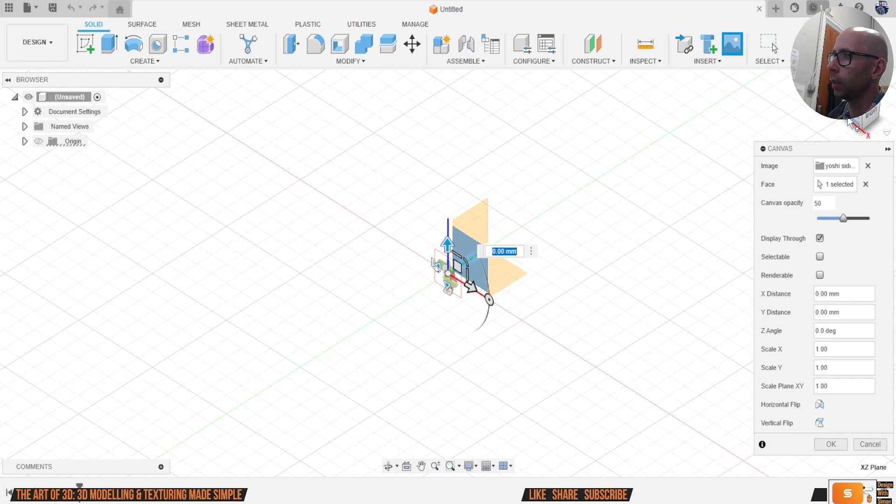So first thing we're going to do is bring in our reference image. We can do that by coming up here to insert canvas. I'm going to find my reference image, which I've got down here. I'm going to put it on this side plane, click on the side down here, flip it around and just make it a little bit bigger. I'm not too worried about it being the right size yet. I'm just going to bring it up to sit on the top like that.

The next thing I'm going to do is hit save and call this something like that, so that way autosave's kicked in. So the first thing we're going to do is essentially sketch out the 2D profile of all of these individual bricks. So I'm going to click on sketch, click on this, and then basically it's using a lot of lines and circles. So you go to create and line there, or keyboard shortcut L. It doesn't matter where you start, but I'm essentially going to just start following along close to the reference as much as I can.

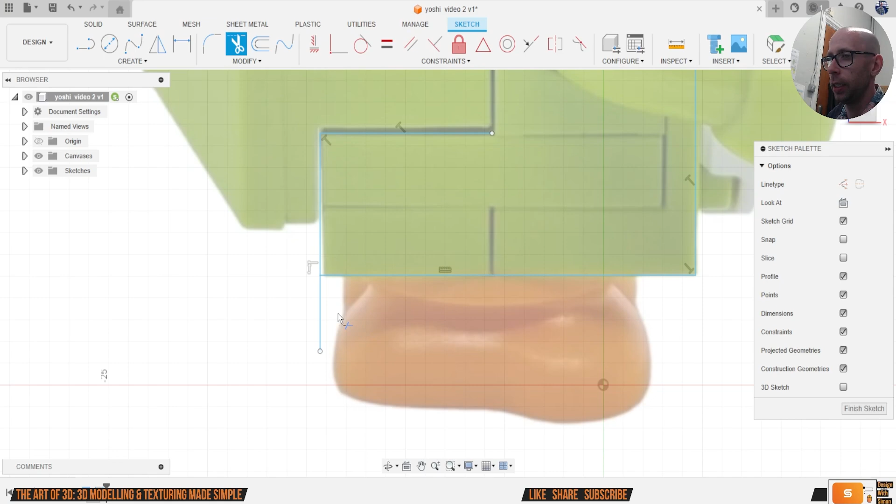So I'm going to do individual bricks. The key thing I want to do here is make sure everything matches up. So here you can see it doesn't. You have to modify and extend, just extend that bit. I'm going to hit T to trim to get those bits off. So that's the overall bit there. I've not done this one here, but I want to actually do the individual bricks as well. So I'm going to go across here.

You come up like that. Anywhere where there's separation, where these are clearly separate bricks, that's where I'm going to come across. And I'm going over because sometimes if you go a bit too close to a line, it tries to snap onto certain points. It doesn't always snap where you want it to. So I'm going over a little bit so I can do it that way.

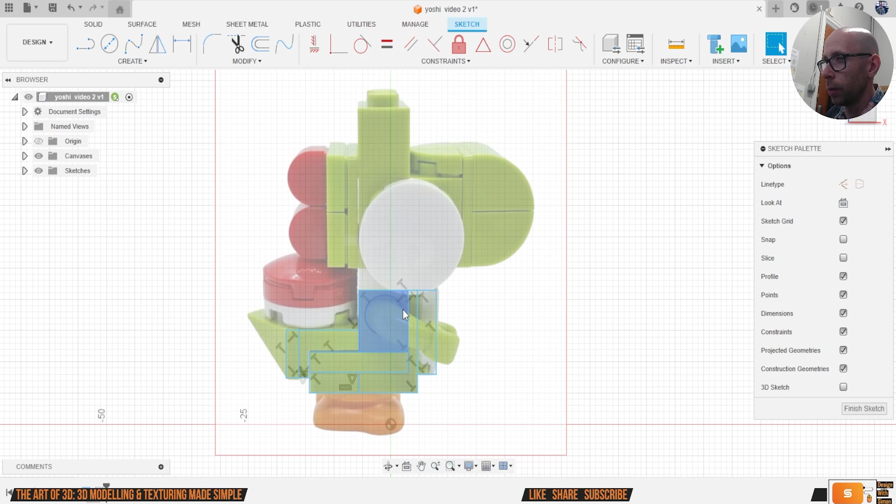I'm going to do this bit, but I'm not going to do this bit yet. I'm going to leave that a little bit later. I'm not going to do the arms yet. I'm not going to do the shell yet. I'm not going to do the cheeks just yet. I want to get this idea of the actual block of everything first. So let's come up.

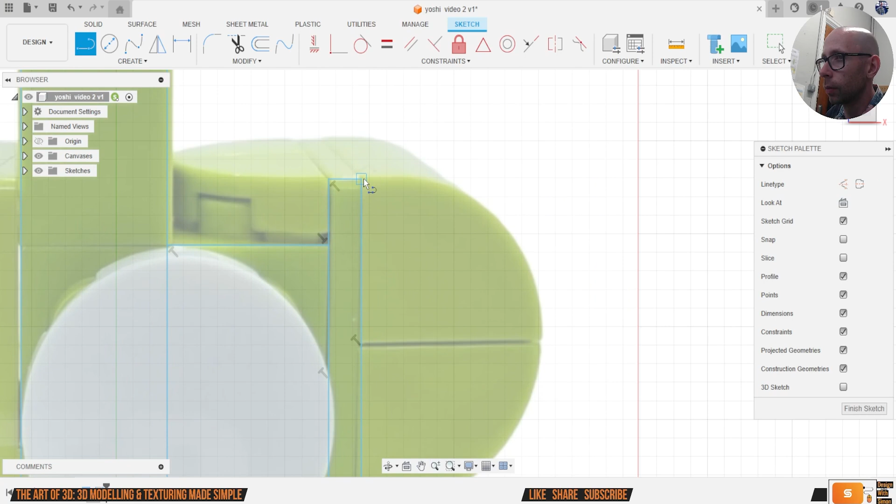I'll make sure those line up. And these ones here, I'm just going to do as a normal rectangle because we'll fillet these edges round. So don't worry if they're not matching up like that. So that comes across there. We're going to trim that section off. We want those to line up like that.

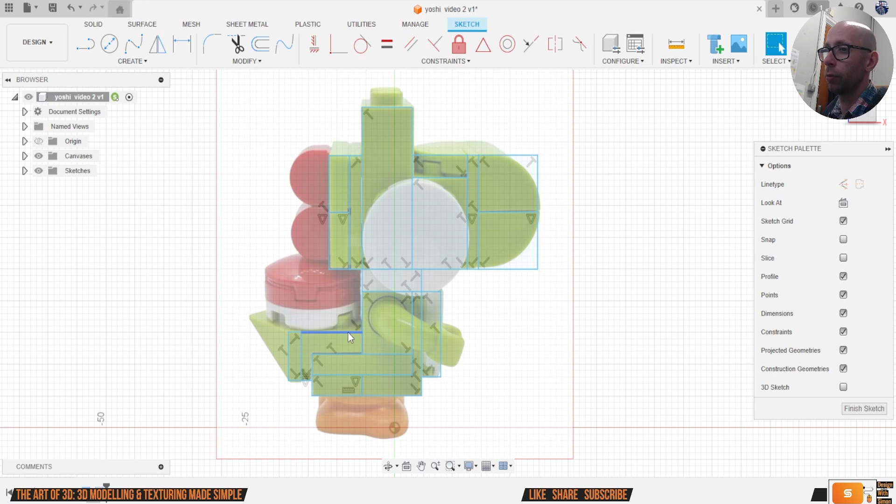Okay, so we've got the rough shape of where most of the bricks are going to go. There's certain parts we'll do separately: the bits on the shell, the bits on the back of the neck, and the feet. But for now, hover over, and if it highlights, that means it's a closed profile. We can start to actually turn it into a 3D object. You can do that by either clicking Finish Sketch or go to Create and Extrude. It's keyboard shortcut E. You don't even need to finish the sketch. If I go back into this sketch and just hit E now, it'll finish the sketch for me.

So I'm going to pick one, doesn't matter which one to begin with. We'll just grab the nose. I'm going to set it to symmetric, so it's going to be the same on both sides, and drag it out. Now I don't have a reference image for the front, so I'm kind of just going to go by what I feel will be about right. So I'm going to do something like that. Click OK. Now once we've done that, Fusion thinks we're finished with the sketch, and the sketch has disappeared. So we're going to come under sketches, turn the eyeball back on, like that. And now it's pretty much the same thing.

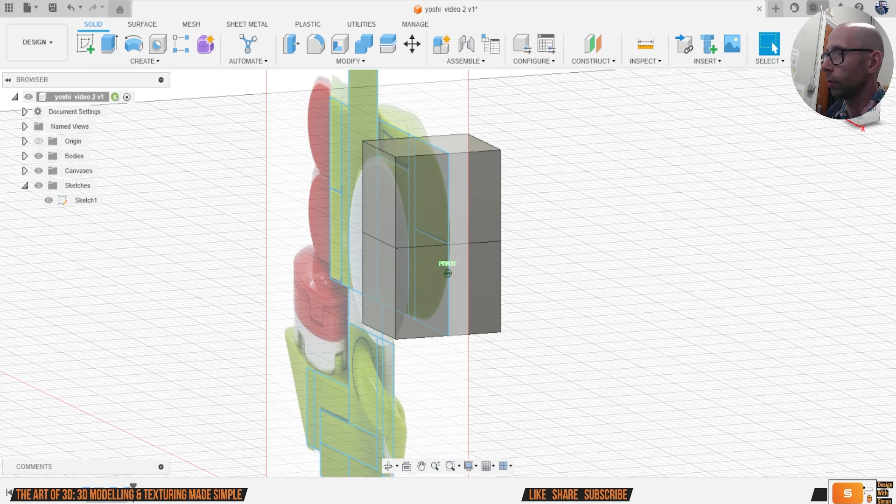We're going to hit E to extrude. Now, I know what measurement I did, but say you didn't, you could just click on that edge and it will automatically do the same. If I go into symmetric, do that. So it's the exact same measurement, but it's trying to join it. So I go from join and put that to new body, like that. So now it's a case of just repeating that step.

So what we're going to do is just go along, click on each one, go to symmetric, and go to new body. There's a bit of rinse and repeat of this bit, just sort of block it all out. Because all we're trying to do is, first of all, make sure everything is symmetrical, and we want the middle of the body to be the middle of the actual workspace. So when we do symmetry, things like that, it makes it a lot easier.

So there's nothing super exciting or complicated to explain for this particular bit. It's just a case of making sure that it's symmetrical and they are separate bodies. So we want to make sure, turn the sketch off so you can see what's going on. They are separate bricks. That's the key thing that we want at the minute. So I'm going to turn it back on, keep working our way around.

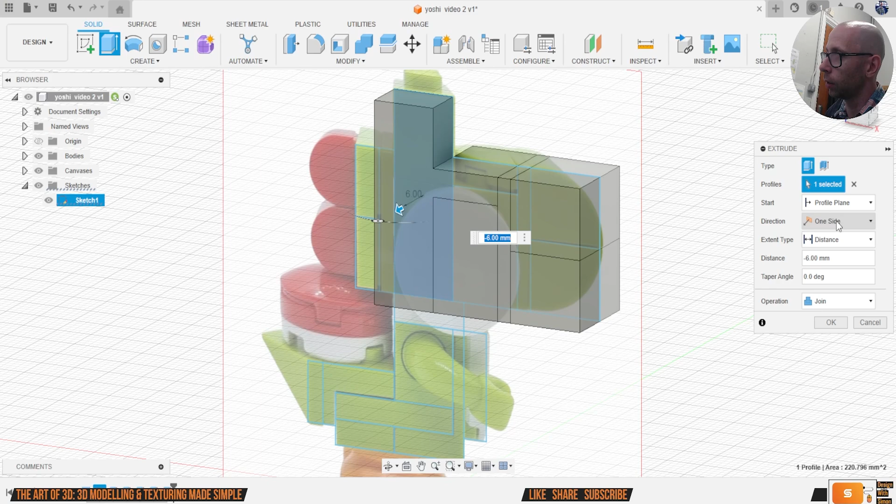If I remember when I'm editing this, I will speed this up, although I always say that and then I always forget. Make sure it's symmetrical.

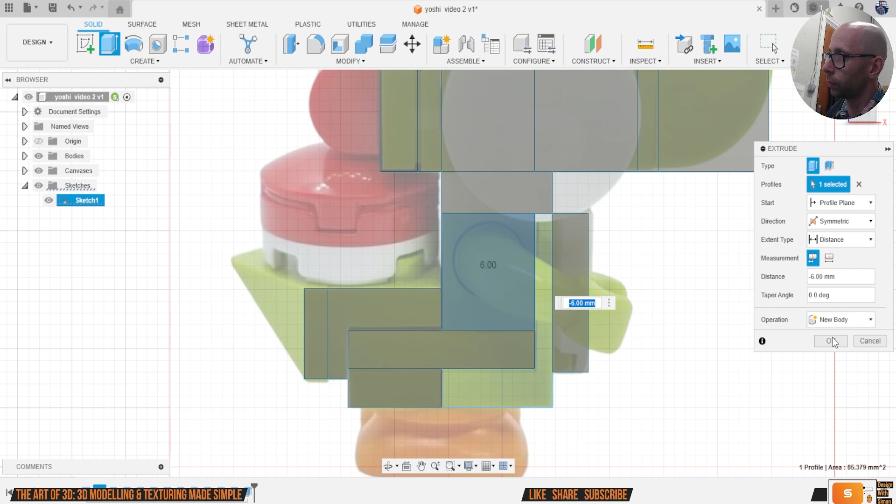Okay. So if we have a little look around, you can see we've kind of got the rough sort of shape that we want. I'm just going to start to shape a few more of these. So I'm going to turn that sketch off now, we don't need it. I can press the eyeball. If I hit F to fillet, I'll come to modify and fillet there, but keyboard shortcut F. I'm going to grab tips of nose and drag in to round that off a little bit. Like that, just going to give that a bit more shape.

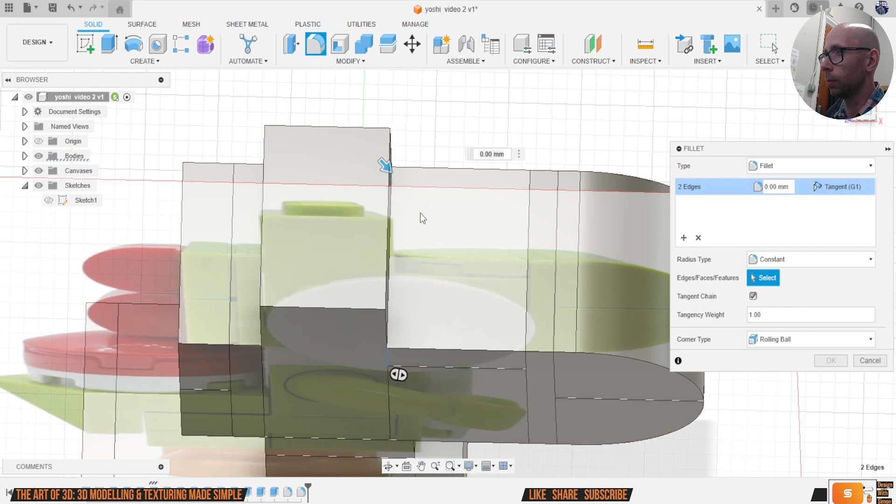Same with his tummy. Up a little bit. Like that. The same up here as well. So let's grab this bit, come to the top. Like that. It's starting to take a bit more shape.

What we'll then do is let's have a go at doing his tail here. So I'm going to go to construct, offset plane, or you can just click on that. That's the automatic one there. I'll drag up so this line here is in line with that. I'm going to create a sketch. And all I'm going to do is hit P to project that cube. L for line just to find the middle and just draw it down. And the whole point of doing that is just so I can get this particular dot.

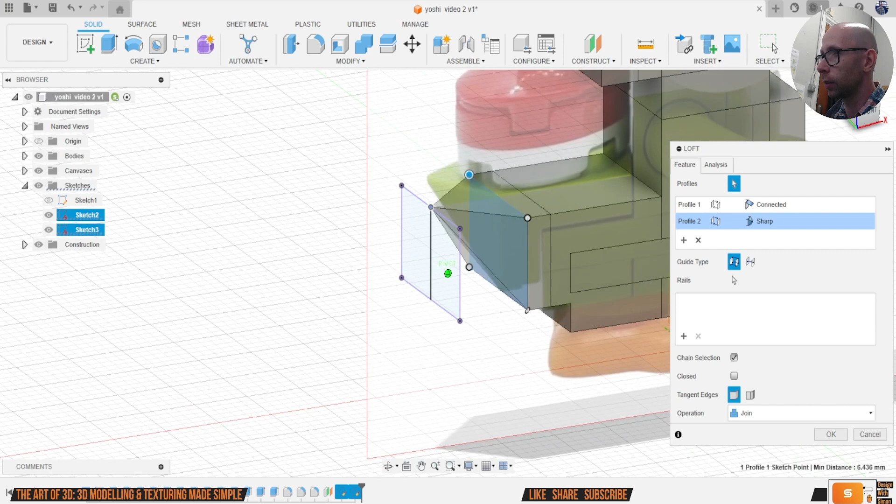I'm then going to create a sketch again on this plane and straight away just finish sketch because that means there's now a sketch plane on there. So I'm going to create loft, click on that surface, and then I click on that dot, and you can see we're looking okay. Turning off sketches and canvas for a second. It's just drawing that together like that. Now at the minute, obviously, they're not looking very Lego brick-like because they're not rounded. We will round those off as we're going through. I just want to get an overall rough shape of everything to begin with.

Right, let's do the spine bit. Let's go to, maybe do rectangle. Hit R on the keyboard or create rectangle. I'm going to go 2-point rectangle and we'll click there, then drag out. But I'll actually probably want to drag that there, like that.

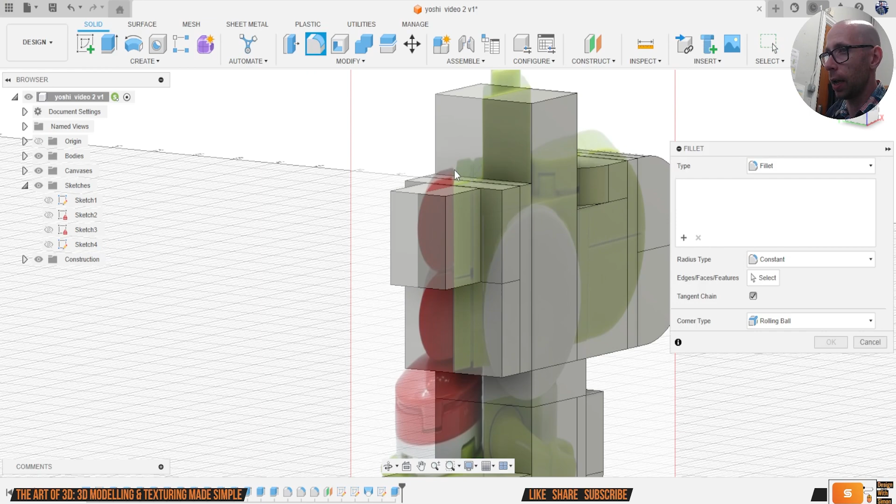Let's hit E to extrude. Don't need to go to the sketch. We'll do symmetric again, and it's not going to come all the way out. It's going to come a little bit, so something like that. And again, new body. You want to round that off, so I'm going to hit F to fillet, grab those surfaces, and drag around to round it off.

Like that. And I want two of those, so what I can do is open my bodies folder. That's body 16. I can do Control C, Control V to copy and paste, and drag down, bring it into position like that. So we've got most of the rough bits done.

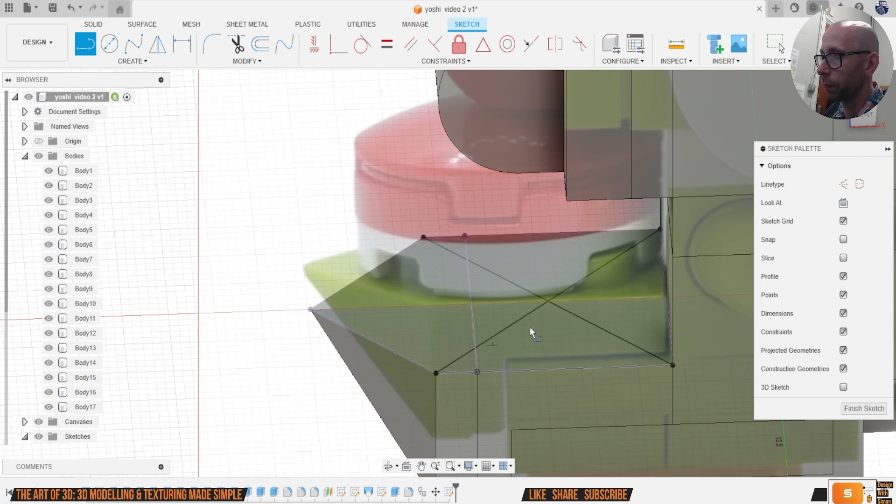I'm going to hit E to extrude, profiles, bring that up. It's a new body again. And then just hit that surface, hit E to extrude again, drag up. I'll change that to new body. We'll do it one more time. Grab that, hit E to extrude, drag up again. New body, like that.

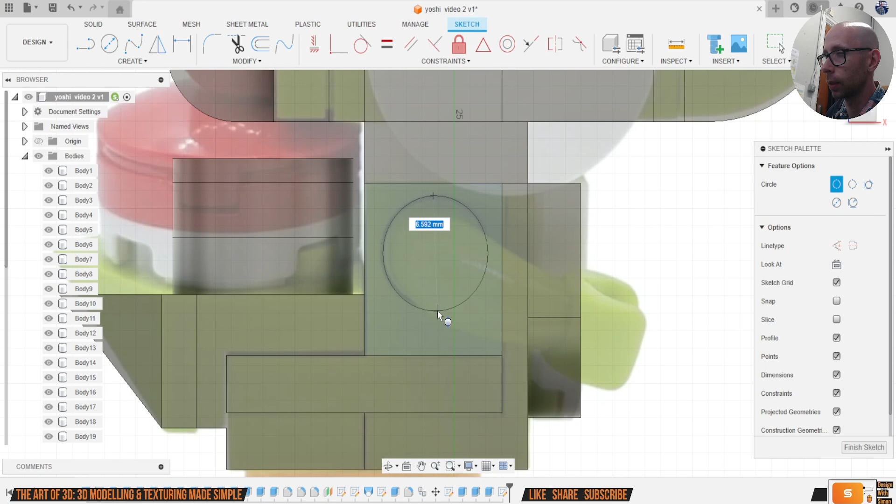So I think the next best thing to have a go at doing, let's do a hole where the arms are going to go. Create a sketch on this surface here, I'm going to do C for circle, then click here to 2-point circle and just click top there, like that. Hit E to extrude, and I can just drag that all the way out, like that. Got a hole where the arms are going to go.

So while we're doing it, let's do the arms. We want to create the arm profile. So let's go to construct, and we're going to go to axis through a cylinder, just so we can get that line there. Then I can construct a plane at an angle. So I can click on that and click on OK. That just means that's right in the middle.

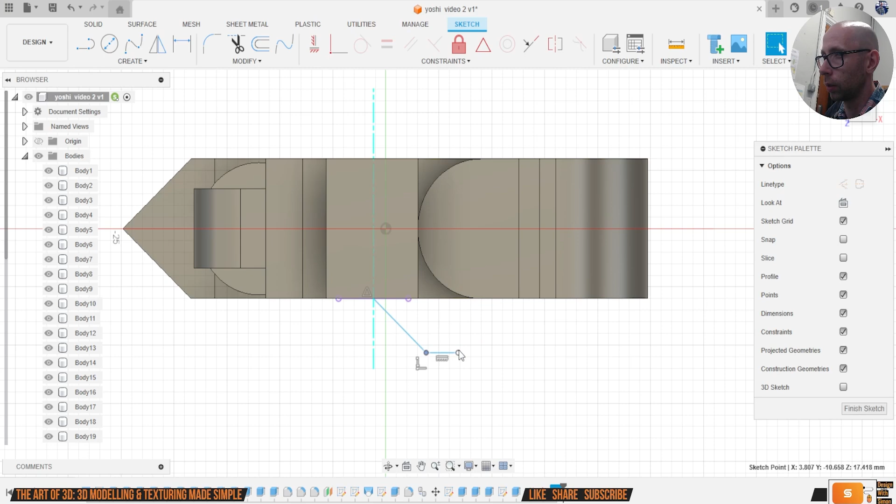I'm then going to create a sketch on that plane and hit L for line and just draw out roughly the sort of shape of the arm that we want. But we don't want it to be too long because we're going to do the hand as well. It's going to be something like that. We're going to finish sketch. So we've got the profile there.

What we want to do is create a sketch. Oh, no, it selected that. Create a sketch on this profile here, and I'm going to finish sketch. So that means there's now this circle here. I'm going to go to create, we'll go to sweep, grab that profile. I can grab that path like that.

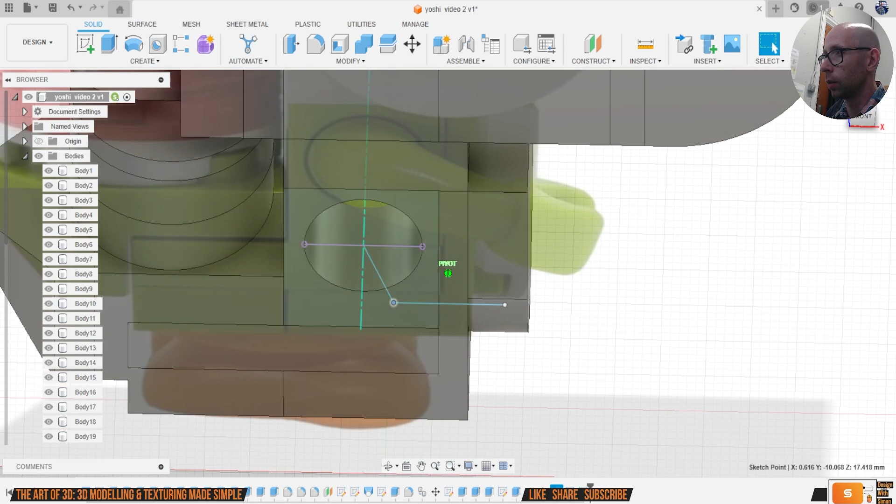You see what's going on. We're starting to get our arm. Now we may need to play around with that a little bit. Let's have a little look. I'm going to cancel that. Like that. So that's going to create a sweep, depending on the sort of shape of the arm you're after. That looks a bit more like it.

Because we're going to have the hand, we don't want it to be too long because the hand starts like that. So in fact, we'll do a little bit longer. Click OK, because then we can cut it off. Okay, so what we'll do, create a sketch just on this bottom plane here and hit L for line and just do a line, right?

Like that. Because then what we can do is go to split body, grab that. We can remove this one. We've got our bodies folder open. It tells us it's that one, so I can turn that off. So now see we've got that sort of profile.

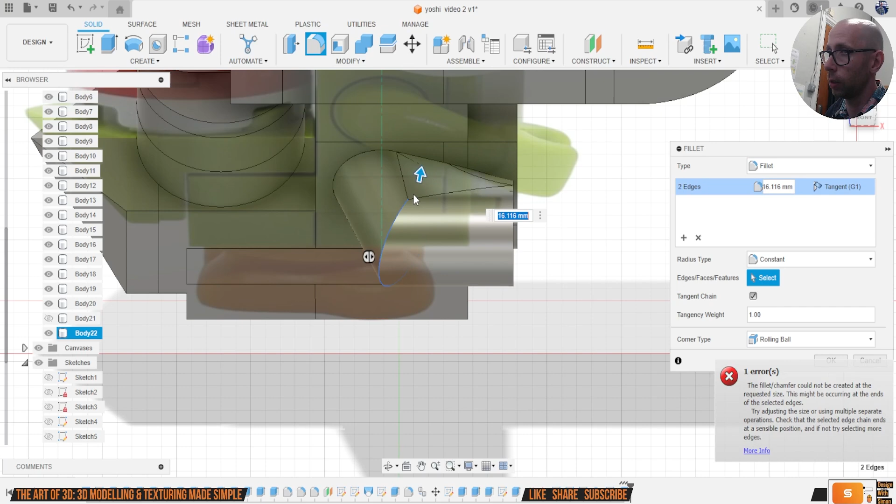I'm going to hit F to fillet and just try and fillet this a little bit. It's not going to let me, so let's do a little bit. Like that, so it's a bit more rounded. I'm also going to go to modify and chamfer edge, and what we're going to do is do two distances. So I can drag that down a bit. I can drag that back. So it's got a bit of a taper going towards his hand. Like that. And then hopefully we'll fillet this a little bit as well.

I always find the best thing with Fusion is start low and keep going until at some point it won't let you do the fillet. It just means you've got a clean transition, basically, so when you're actually modeling it, you don't end up with any weird sharp edges, which we don't want. Okay. So we've got an arm.

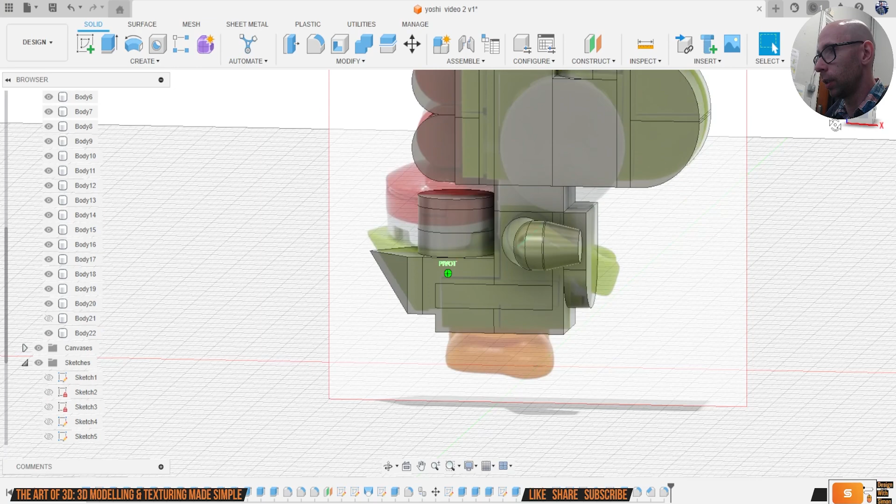Let's then just do our hand. Same as we did before, we're going to construct an axis through a cylinder. Oh, it won't quite let us do that, that's fine. What we'll do is create a sketch on this profile here. Find the middle. Like that. Create a sketch. And then we can go to construct and plane at an angle. Like that, which means it's going to be right in the middle where the hand is.

So the hand is literally just create a sketch, a circle, so I'm going to C for circle. Go to 2-point circle.

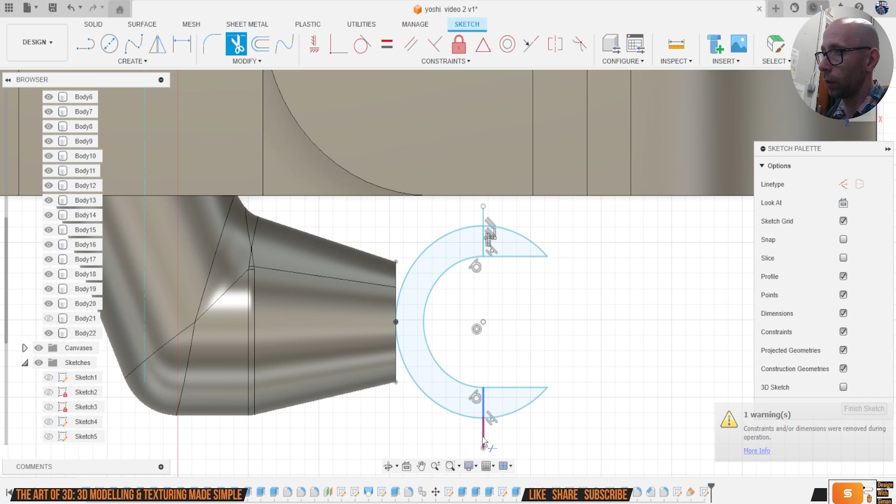Do an offset and bring that in. Not quite, like that. Right in the middle. And then I'm just going to use that to come straight up. Then I hit T on my keyboard to trim so I can cut all these extra bits away. Like that. So we look like a hand profile.

I'm going to hit E to extrude. Go out with that. Bring that up. A little bit clearer, and we'll do symmetric. Okay. So we've got what looks like a hand. I want the arm to connect to it. See here I've got these sketches open. I can then turn off these sketches with the eyeball so it's not in the way.

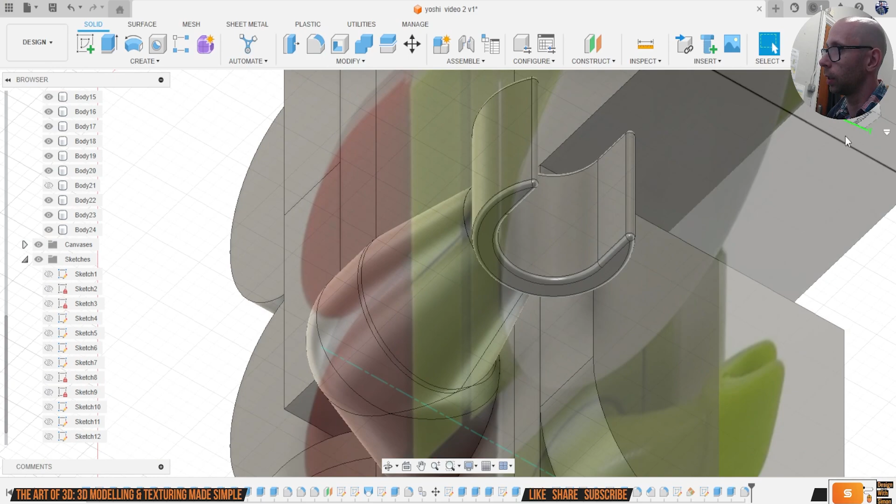I'm going to grab this profile, hit E to extrude, and just drag it in like that. I'm going to join them, but not just yet. I'm going to hit new body first. Hopefully it will let me fillet these. I'm not coming out that much there. There you go. Then let's join those together.

Now, let me fillet this transition. Oh wait, that's not joined yet, is it? So let's combine that and that. There we go. So let's do it. What? Okay, so we've got one Lego arm.

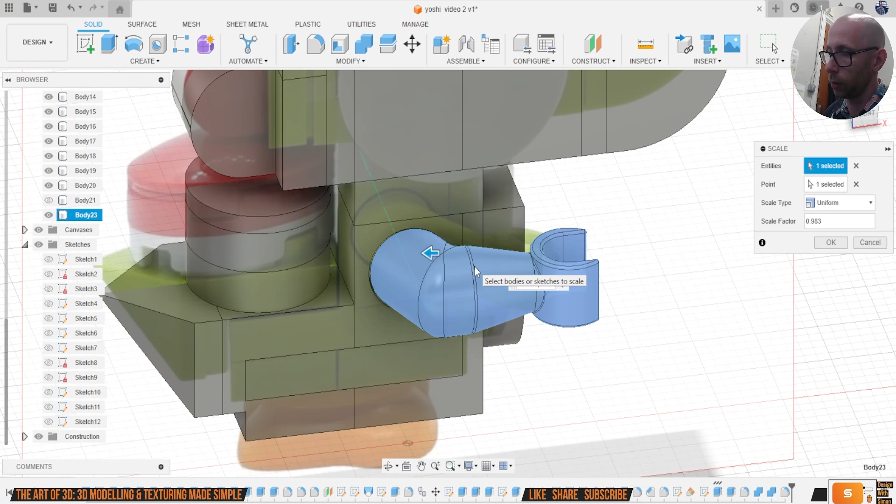What we may do is let's modify, scale, make it a little bit smaller. And, or maybe not. Let's just take that, right click, move copy. Then I'm just going to rotate, move into position. Like that. One arm. Mirror that across.

I'm going to create mirror. And this is why I made sure our model was right in the middle. Let that mirror play in. Okay. So now we've got two arms. Let's then come over to this part here. And what we're going to do is actually get rid of that bit because we want it to be like

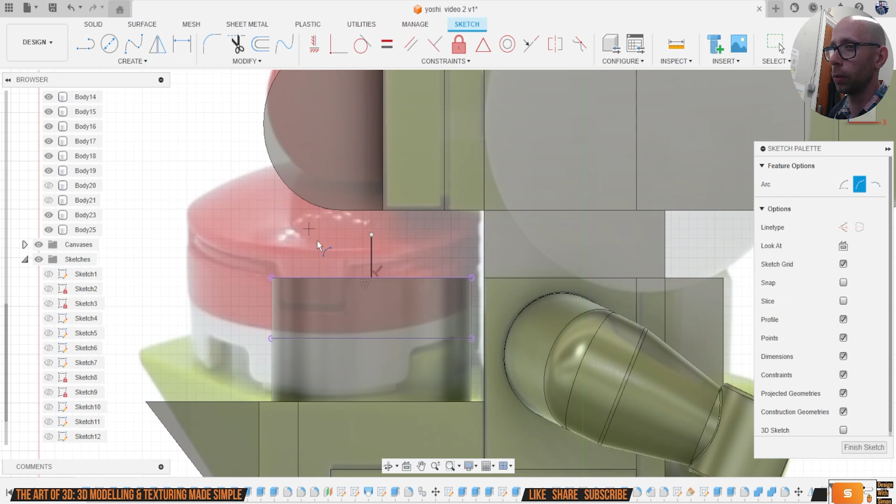a cone. So we're going to create sketch, hit P to project to grab that profile, L to line to find the middle of it. I'm going to come up like that. I'm going to create arc, 3-point arc, and just click there, and in the middle. Finish sketch, and we'll revolve, so create and revolve, grab half that profile, and revolve it round, like that, so it's more rounded.

Let's then combine these two together. What we'll do is, I think the best way, construct tangent plane, create sketch, P for project, and then just by hand offset this line slightly.

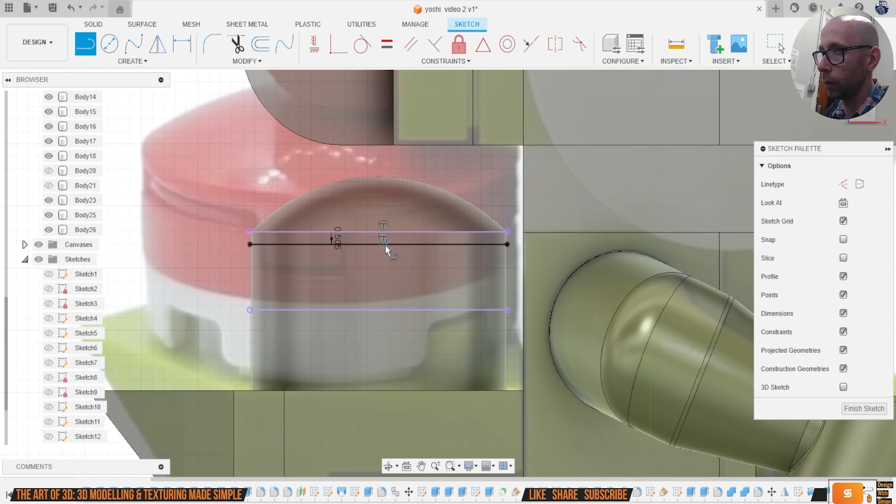L, come down like that, and we're going to mirror that across. Like that. And then let's split body, grab that body. Let's just edit that sketch properly. Let's trim that bit off, that bit off. Finish sketch. Then let's go to split body.

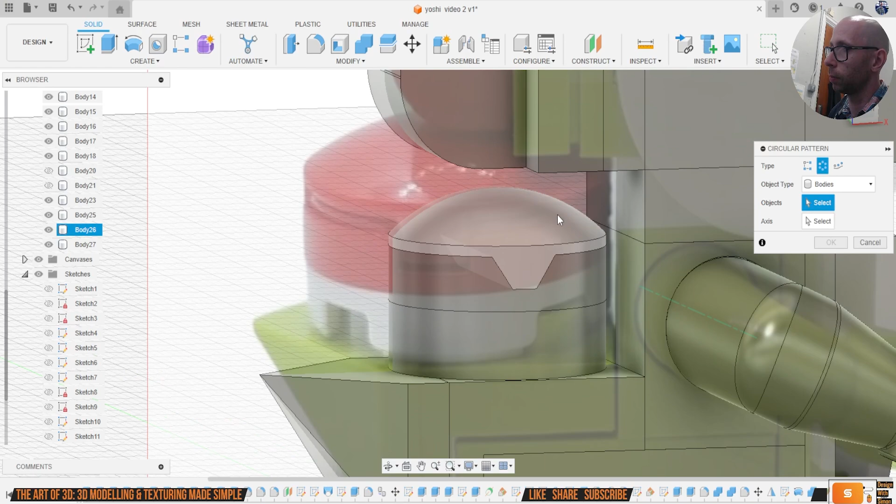Like that, but we want to have that all the way around. So let's go to create pattern, circular pattern, change that to bodies, do that split body. And hopefully if we do 2. No? Okay, so what we'll do then, let's create pattern, circular pattern, body. Like that. We'll take this body, hide it. And then we're going to combine two bodies we just did, like that.

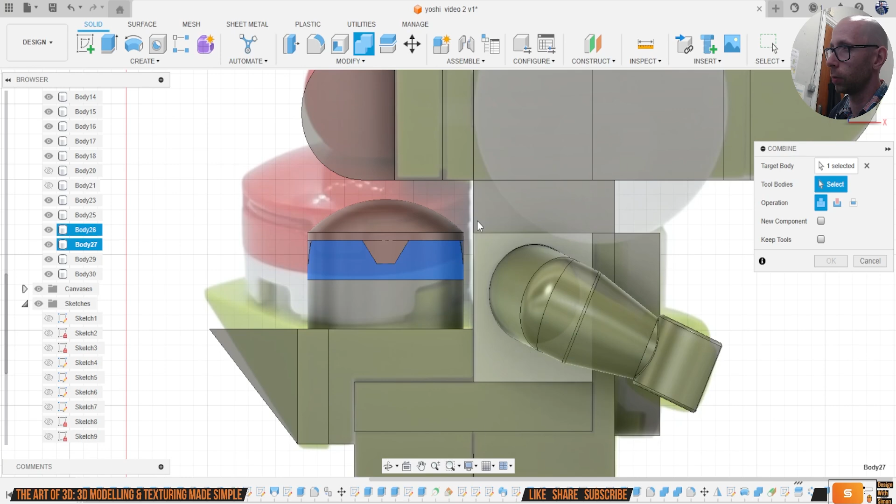And then we're going to take this one, right click and isolate. Create a sketch on this bottom, C, circle. And then we're going to take this and extrude it inwards. So we've got that bit. We shall hit F, fillet. Well, no, we don't want to do the fillet just yet, do we? Honestly, I think we've got this body here. So we're going to do combine cut. So we're going to cut this one with that, set it to cut, but keep the tool. Because then if I turn that one off,

Sorry, I need to turn off my camera for a second.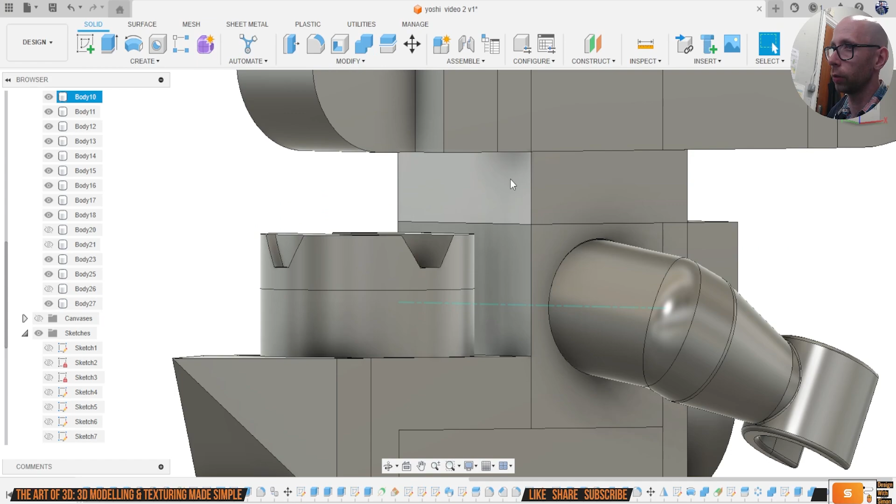I think I've got two of the same thing going on. It's this one here. Okay. So what I don't want then are these ones. Let's take this, right click and remove. There we go. So what I can do is combine that one and that one. Cut but keep. Now if I were to turn that off, you see what happens. It's now cut into it. So it looks like it's actually connected, which is what we want.

Let's start adding a few fillets to everything. It would be better if we take this and isolate it first. Right click and isolate. To fillet. One's probably about right. Depending on the size you've made it, your fillet might be slightly different if you are following along. I'm holding down control just so I can select multiple at the same time.

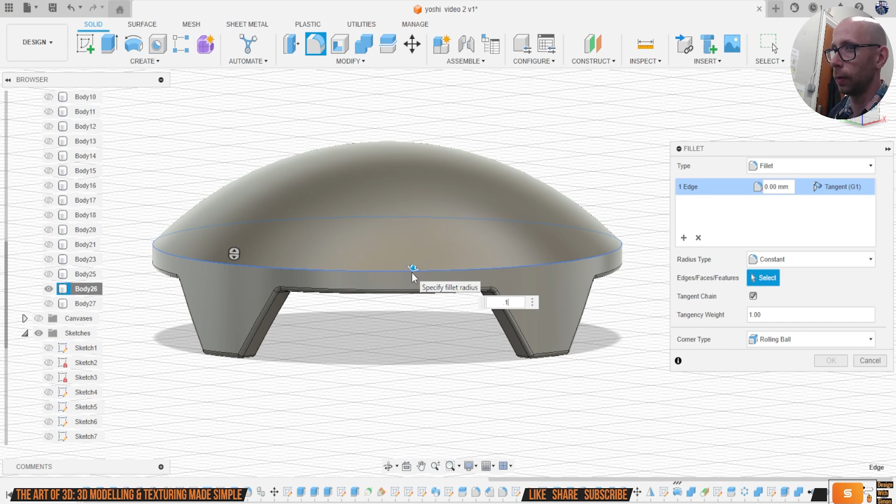Click on OK. We're probably also going to give this a quick little fillet as well. Like that. Then I can unisolate. Bring that back. Let's hide this. Do fillet.

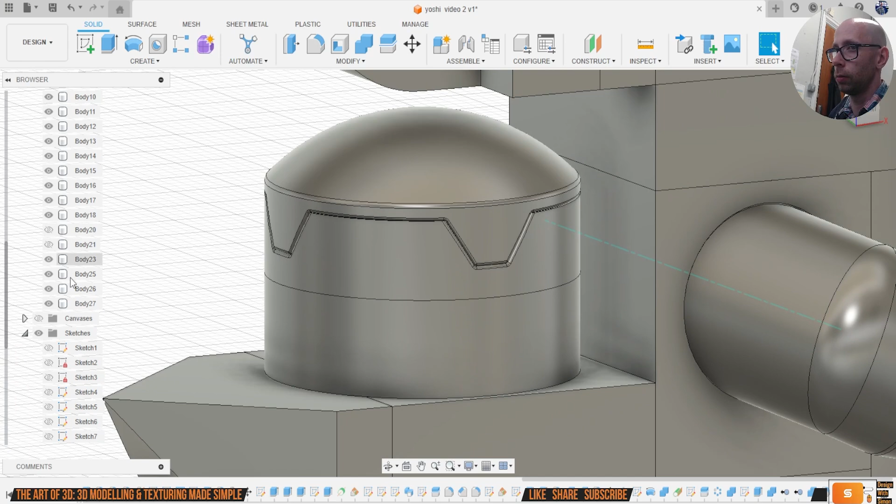Okay, back. Now you can see I have what looks like pieces that are connected together. Let's grab that as well, like that. So let's have a look next. Look at my other reference image, my other screen. So I'm trying to see the best way to go about what to do next.

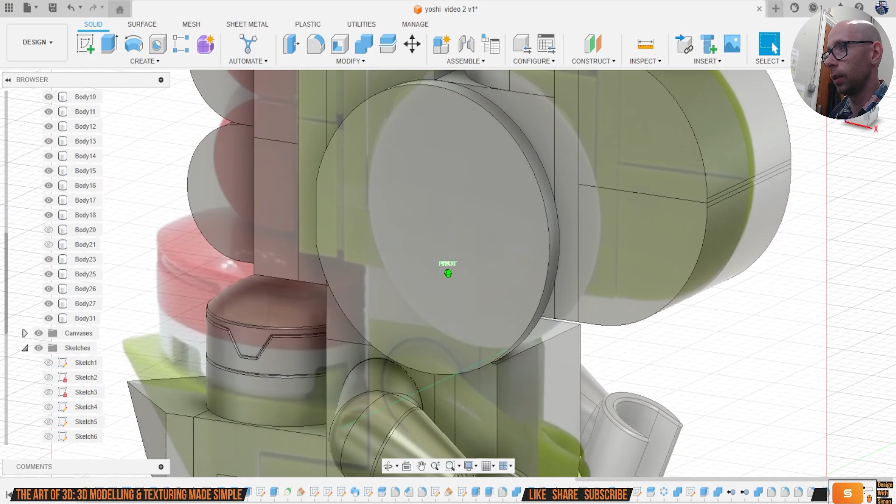Let's do the cheek. Create sketch. See the circle, I go 2-point circle again. Come down here to there. Hit E to extrude. Add like a profile, come out a little bit. Add that to new body. Okay. We'll have to fillet. I'll do point 1. Like that. Okay.

Let's start adding our Lego bits at the top. Create a sketch up here, and we'll just find the middle where the line goes across here. Then hit the circle and drag out until it looks about right. E to extrude. You have to drag up. Now we can fillet. Those a bit more. Okay.

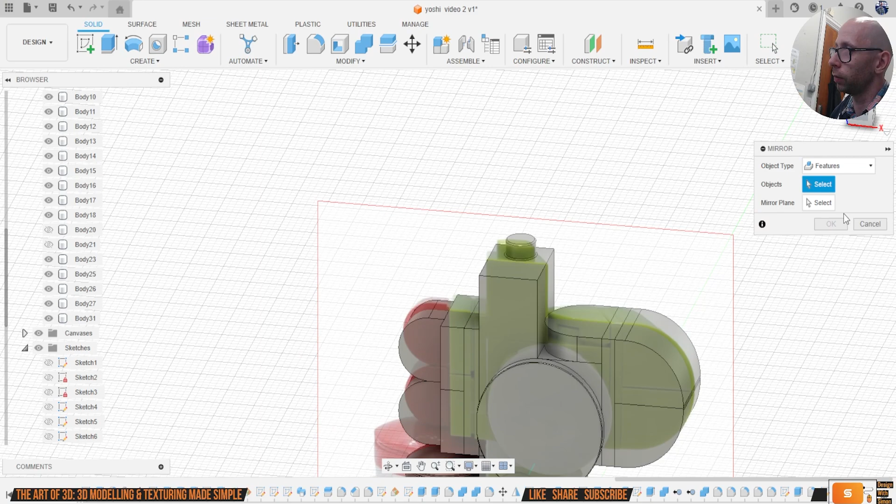Let's pattern or mirror that. So let's go to create, mirror, features, like those, mirror plane, click OK. Now we've got two of them. You can see now it's starting to take shape a bit more.

We also want to make sure the stomach needs to be split. So it needs to be like this. So let's finish sketch, and then we go to split body. Select that first. Turn back to sketch. Split body again. Like that. So we've now got separate pieces.

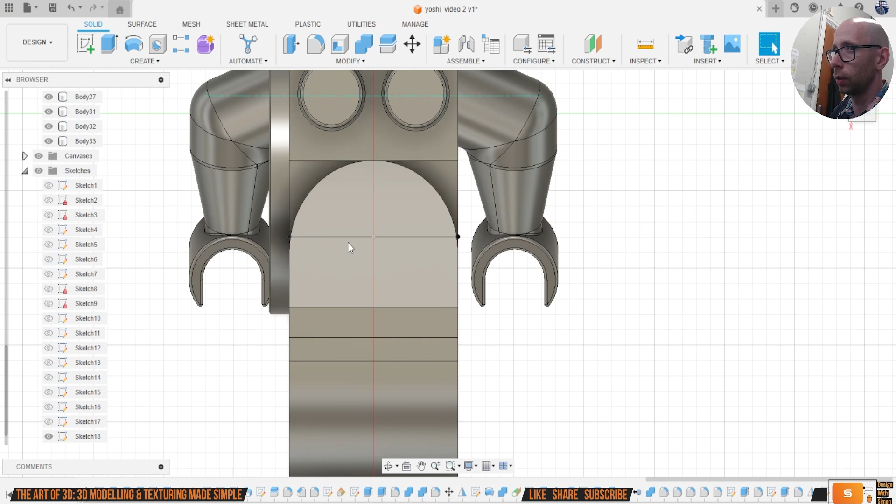And the same up here as well. So let's split this. So when you do split, you don't have to draw across the entire split. Any side line will do. So you could do like a mil thick line if you really wanted to. Just actually separate like that.

So now let's start to do the actual bits. We'll turn off all the bodies. These bits here, so it looks like it's Lego, essentially, that's joined together. So let's take this piece here. Let's isolate it. We don't need to do this to every piece, just the bits that you can see on the reference. So I'm going to just go around, do shell, something like that. And then unisolate, come out to the side.

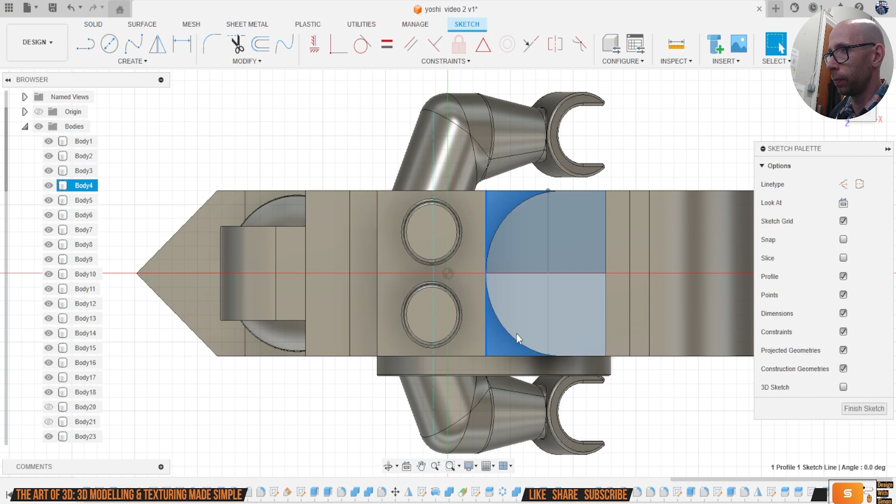I'm going to create a sketch and just roughly draw where I want the circle to be. Something like that. We'll see how it looks in a second. You drag up like that. I'm going to set that to new body. Because then, if you're not happy with the position it's in, if I turn the sketch back on, I can actually move the sketch around. So I can delete that constraint first of all, move that around, and this extrude will move around as well.

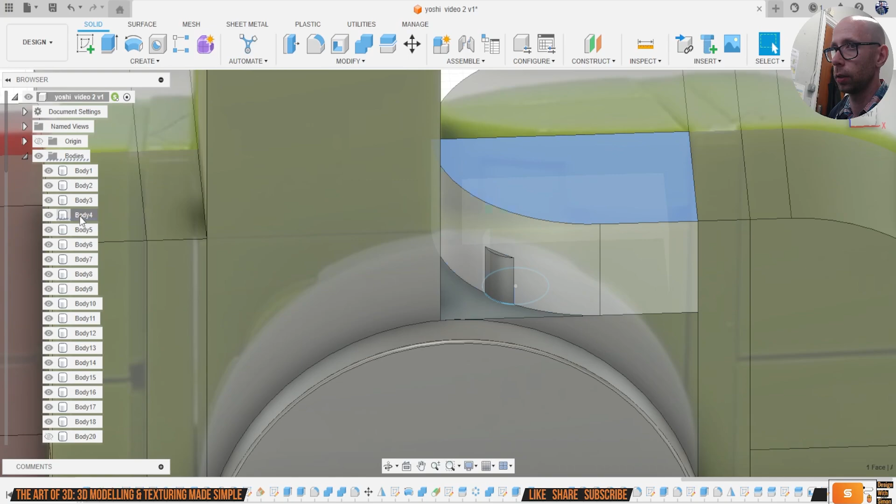I don't want a lot of it sticking out. Don't want that constraint there. Then like that. And then let's go to combine, set to cut, target body, tool body. We'll keep it. Because then what we're going to try and do, if this works hopefully, take this, isolate. Let's fillet it. These, like that.

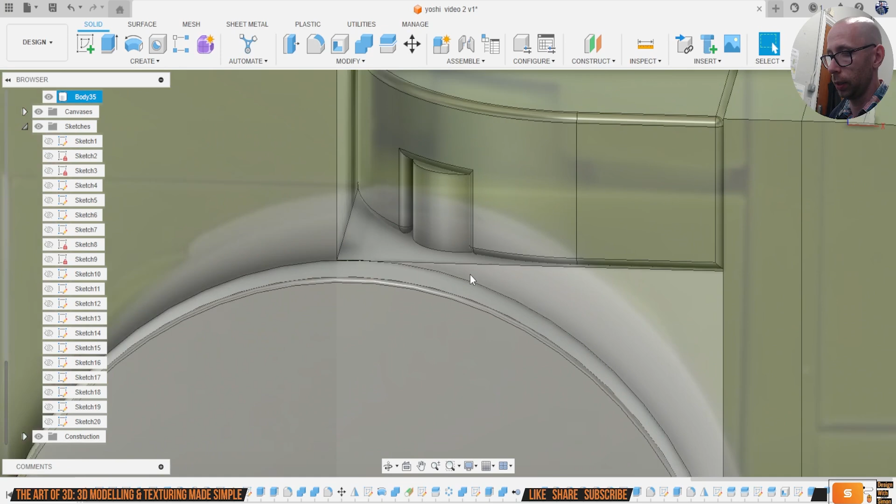Let's just try 0.2. 0.2 works well. Let's try that. And isolate. There you see it kind of shows you it joined together. We'll turn that sketch off. Let's then combine these two together. So that's combined and we don't need to keep it. Let's fillet it like that.

That's now together. Rather than do that again, let's turn off our canvas, take this body, remove, create, mirror, take this body, we'll take that mid plane across there, set that to new body. Now I've got that on both sides. We haven't got that bit there, so what we can do is split this body. Again, use that mid plane there.

Take this off, right click and remove, and then let's create mirror body, and then we can just grab this edge here. I'm going to go to new body first, otherwise it will join everything together, which we don't want, and then let's combine like that. Because if we didn't, everything it's touching would have joined. Okay, so we've got that bit that looks like it's joined together.

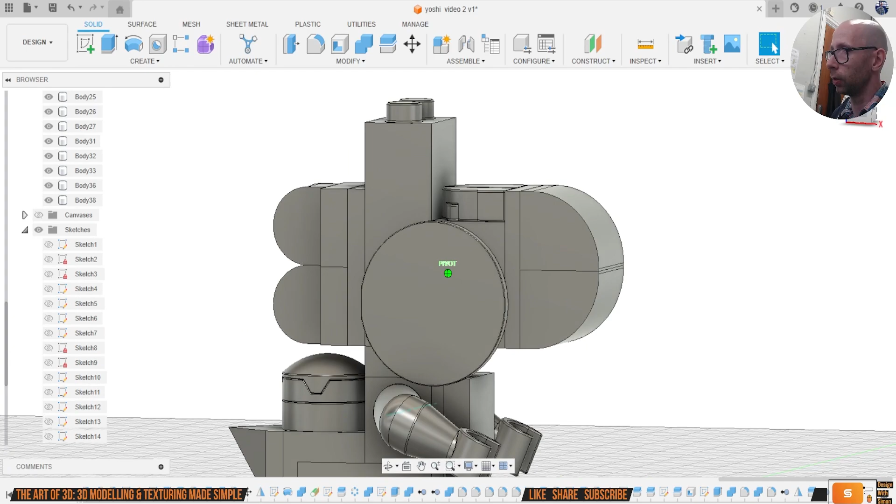We need to do the same on the shell and the stomach as well. Let's do this one. I'll isolate. Pretty much the same thing. Let's do a shell and isolate. Go to the front. Create sketch here. Circle. Yeah, we just want a little bit of it sticking out, just so it gives the illusion that it is Lego bricks, even though we know we did it all digitally. Drag up. That's new body again.

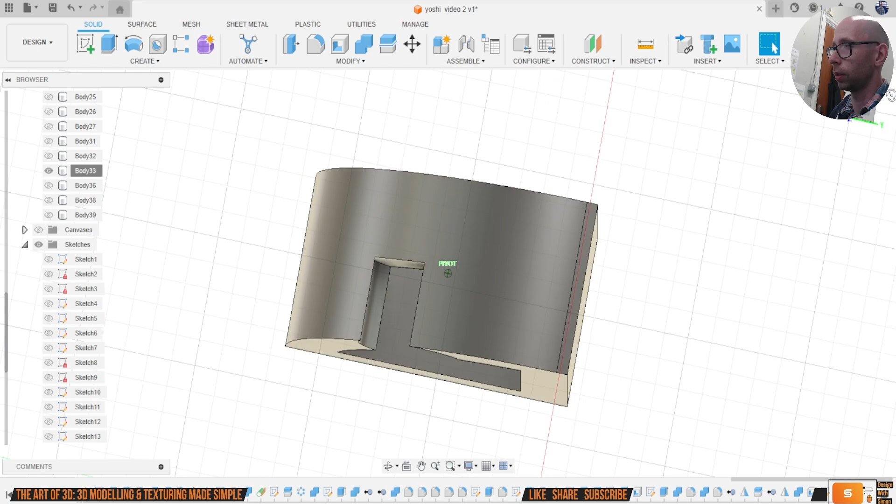While we're doing this, just going around adding fillets to all edges to make them more Lego brick-like. Click OK. Let's isolate. We've got that there now.

Let's combine those two together, but set that to join, and we don't need to click on keep anymore. Fillet, set to 2.

This bit here we can remove. Take that, right click and remove.

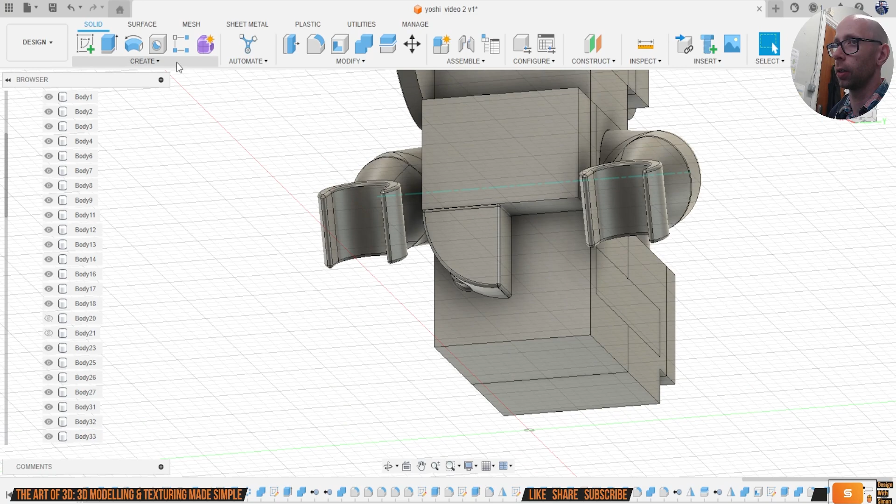Same again, let's mirror that across. So I go to create, mirror, bodies, grab that, grab that one, and again set the new body. And again, we want to split this, so let's split body.

Select this plane here. This side, remove. So right click, and remove.

Let's then go to create, mirror, grab that one, grab it there, change the new body because we don't want it to stick together yet, and then combine those two together.

So now we've got that bit. I may want to try it at the cheek, but I'm not sure yet. Let's just do the tail first.

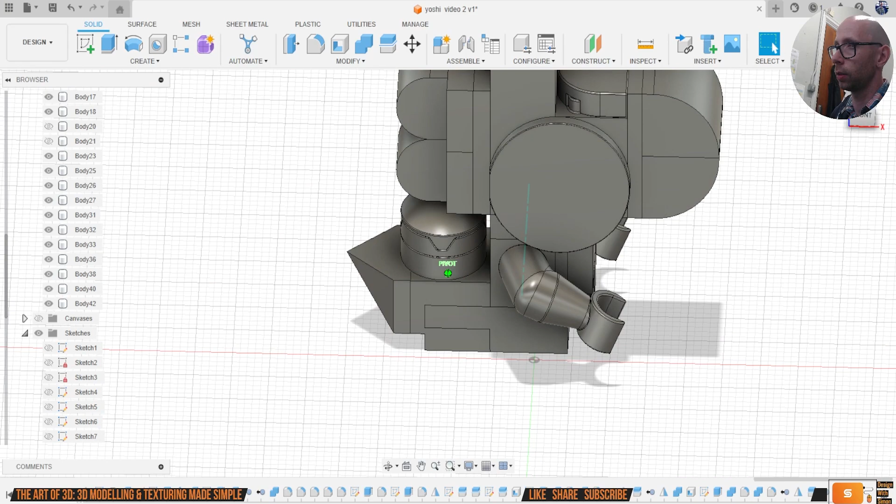Let's just see if I can just grab those. Can I just isolate those ones? I can, okay perfect. What I did then was I left click but drag to the left so that anything it touches, it grabs. If you left click and drag to the right, you have to select the whole body rather than just touch it.

So let's create sketch, do the same sort of thing. Actually, first of all, I just want to take that, don't waste. That's body 11, so let's hide that.

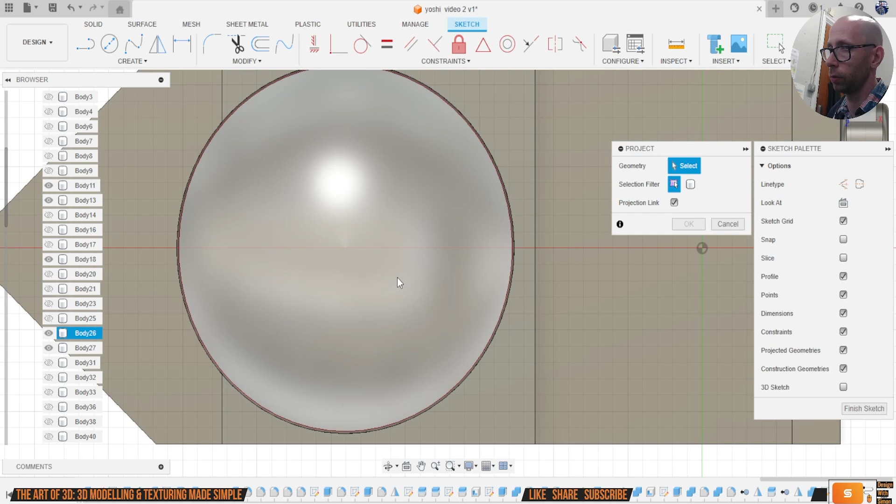Shell. Go back. Create sketch, others, just to make sure it's going to come right in the middle. That's it. P for project, object. We'll do it like there. Draw a circle.

E to extrude. Let's do the profiles like that. Back up.

New body. And what I think we'll probably do, let's go to create, do pattern, circular pattern, grab that, and grab this axis and do 4, like that.

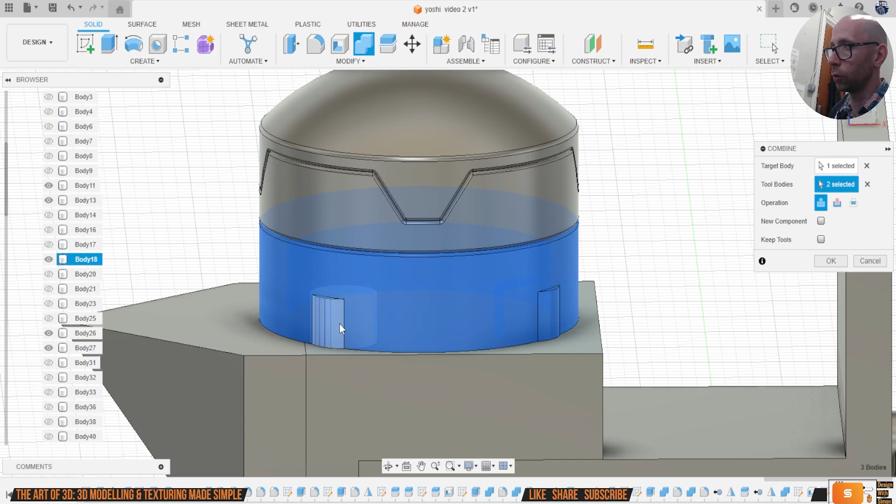Then let's go to cut tool bodies. We can grab multiple, so we'll grab these. So to cut, but keep tools.

Now I can take that one. Let's just isolate. Fillet.

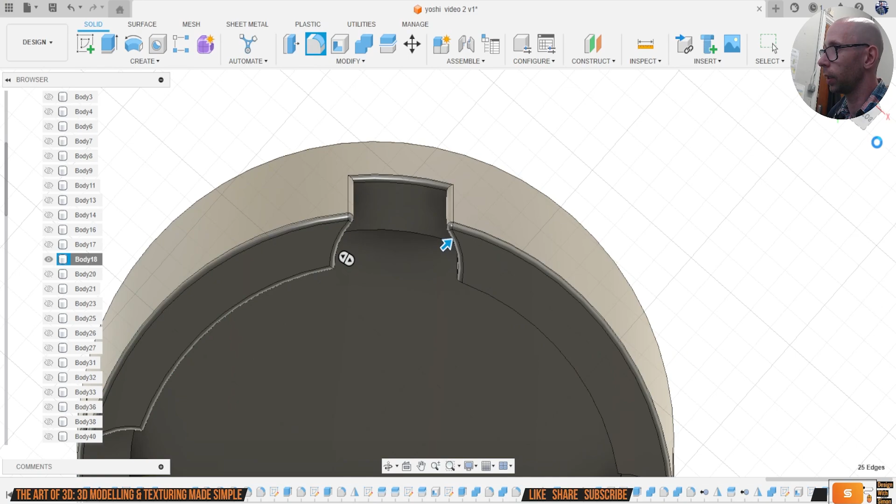Okay, this one, okay. Isolate. Let's combine

these together. Also, let's join that. Or actually, because that's overlapping, what we probably need to do is combine those together as well.

Let's hit F for fillet, put 2. No, let's take this, isolate. Fillet. There you go.

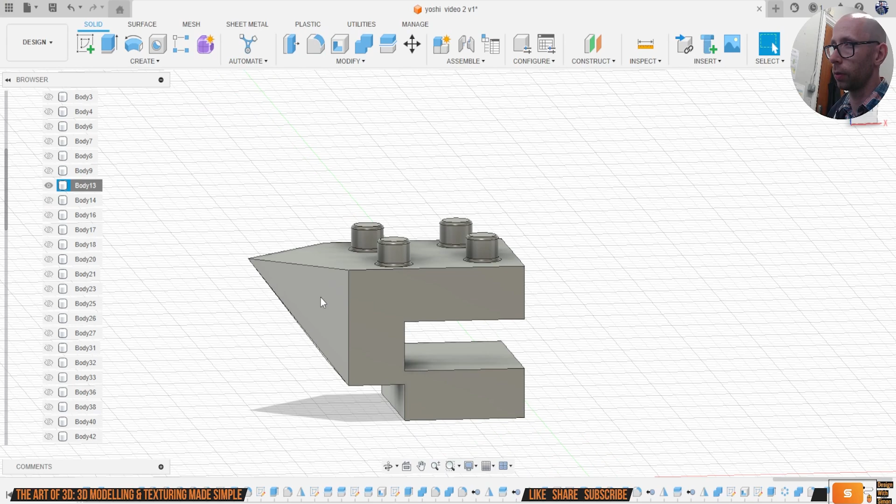Next that. Don't think I want this to be joined, do I? Let's isolate that. No, so let's split body like that. Combine those back together again.

There we go, that was easy. Right, so we've got that. In fact, everywhere that I wanted to. Let's see if I can just change that.

Which fillet, it's that. Let's see if I can go back in time and see. This one, edit feature. I've done point 2 already. Okay, fine.

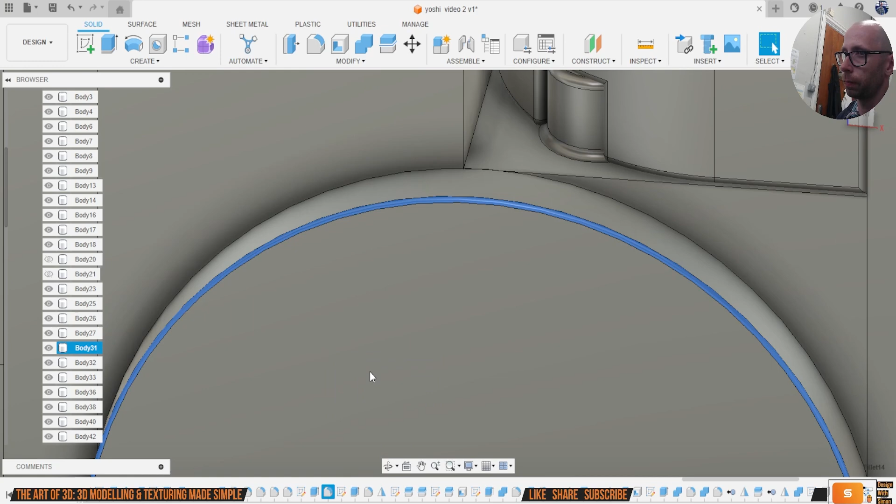All right, so we've still got the feet to do. And I think I am going to do, well, attempt. So let's do this bit first as well. Which one was this? Yeah, there's a couple by 0.1.

Let's create a sketch. P for project, so I can find the middle. L for line, I'm just going to do something like that. Take the circle.

E to extrude. Drag up. New body.

Then let's create pattern, so I can pattern bodies. Take that, axis, I can just use that. We set it to 4, so it's up there. We did 5, so it's up there, but then what we don't want to do, let's go to suppress.

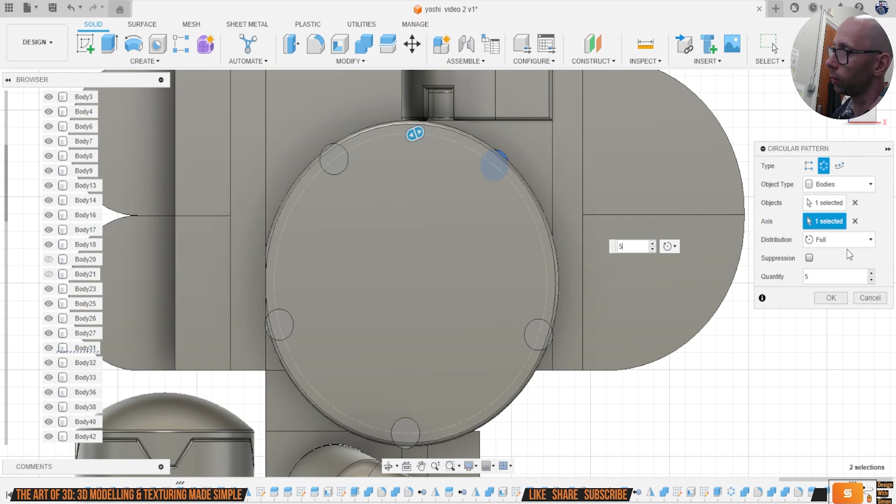So I don't want these ones. You can't see them on the reference. So we'll just do that.

Then let's do combine cuts. We want to keep the tools. Like that. Take this to isolate. Fillet.

Now I've not got a full circle there, so clearly when I did that extrude, I forgot to grab that. So which extrude was that?

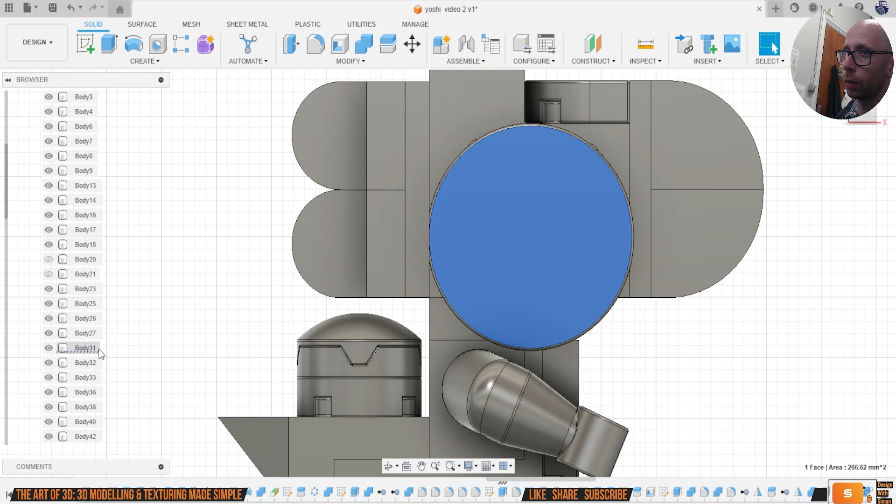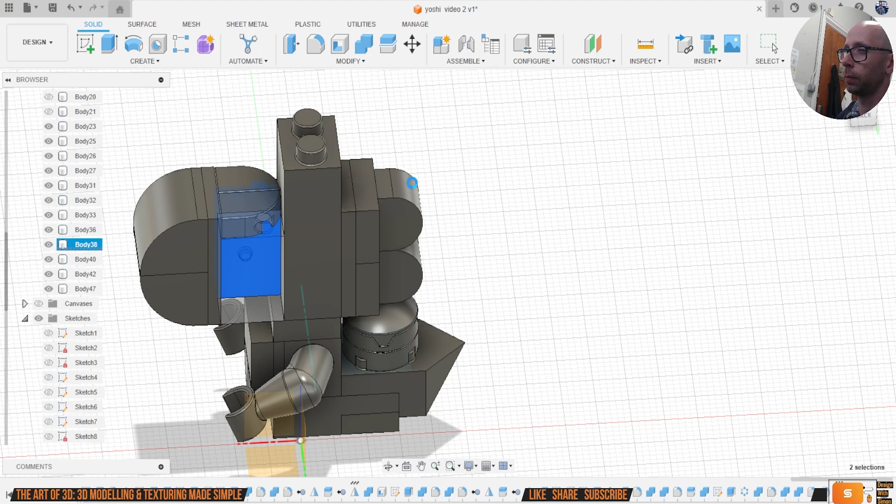So what we're going to want to do is split body again. We're going to split, maybe this one is now split using that plane. Take this one here, right click and remove. Create mirror bodies, just do that. New body, and then combine.

The same on this one here, so let's split body. Take this one, right click and remove. Create mirror. Okay, combine them. And then we can just mirror that across. So that's going to create mirror. Like that.

So, pretty much done. Last thing to do, second last thing to do would be to do the feet. And then we're just going to go and fillet everything that we haven't filleted yet around the edges. Then it's ready to have a go at texturing.

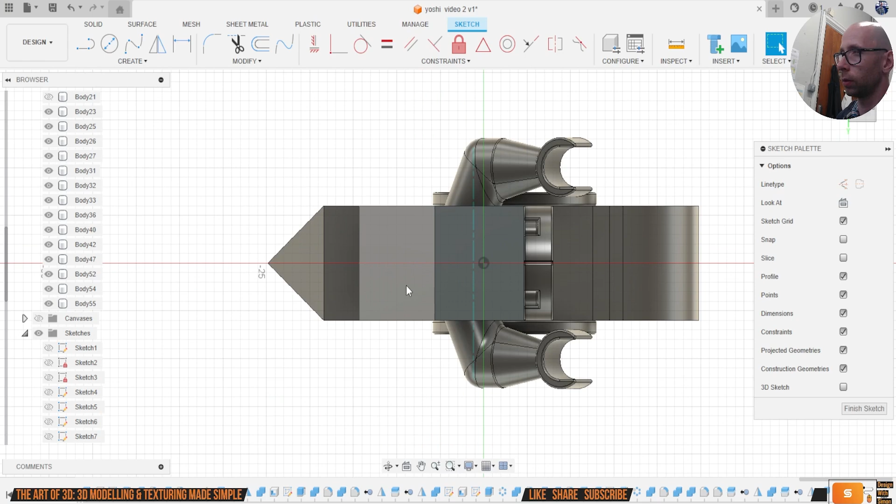So let's come on here, sketch. I'll do circle, but let's hit P to project to grab both of those. A line, right in the middle of both of them, like that. I'm going to hit C for circle and just drag out big so I can get it, like that. E to extrude, grab all those profiles, turn back on that canvas and drag down like that. This could be new body. While I'm here, I may as well delete those.

Okay, so now let's do feet. That's pretty much, we're going to do one obviously, then move it across. So I'll just do a mirror line straight down there. Let's go across here, just so I know that's right in the middle. Leave a circle, and it's going to be a big circle, and then a smaller circle, like that.

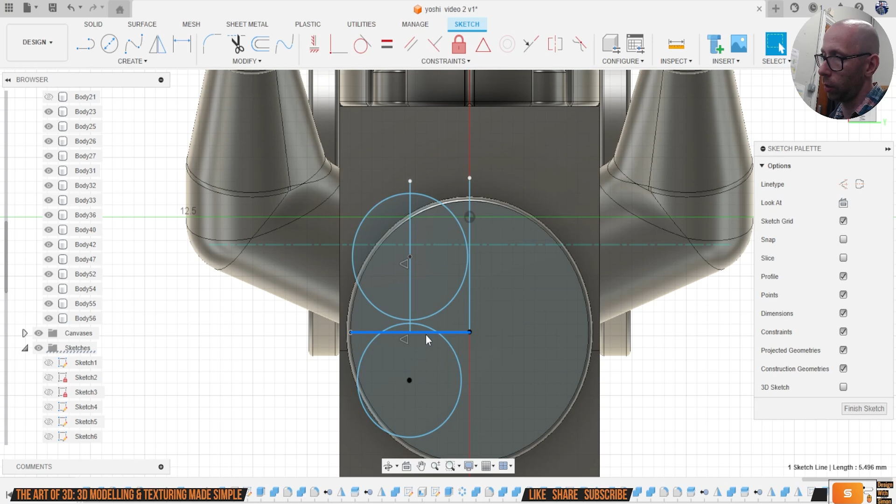A bit bigger, something like that. Then let's, in fact, make it so they intersect like that. Hit T to trim those bits off like that, and let's fillet like that. Hit enter, and then let's offset this whole thing in a little bit. Bit of sketch, let's do an offset on this profile, and down to how far down we want the feet to be, like that.

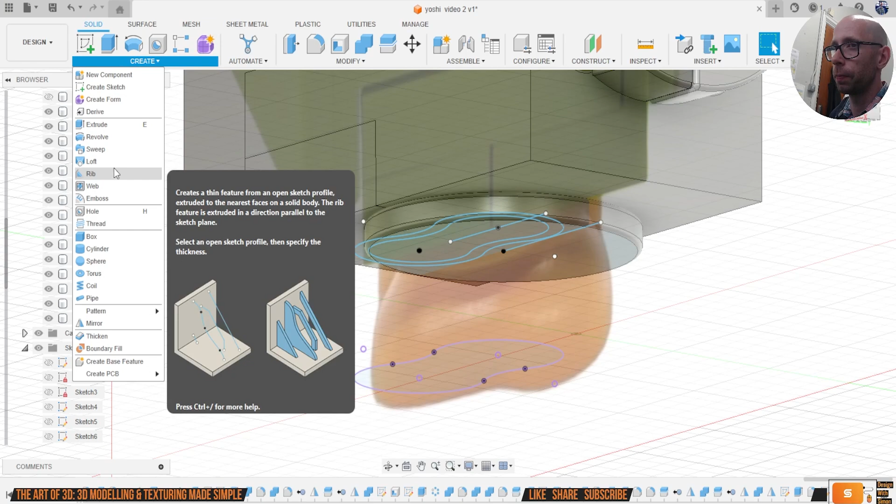Create sketch on this plane there, and we're going to hit P project and just grab the outside bit. Click on OK. So then if you come up, we've got those two profiles. Let's join those together by going to create loft, grab that profile, now that profile, check I've got all of the profiles, like that. Let's hit new body. And then let's hit F to fillet around.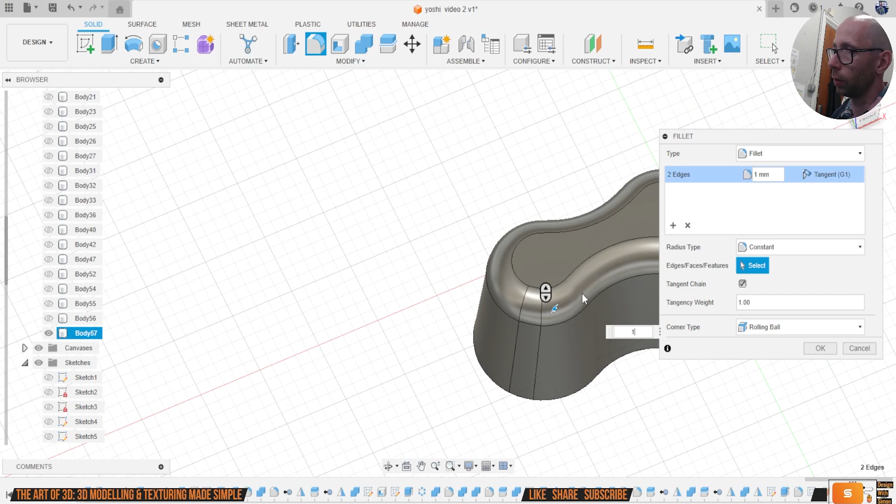Don't look like that's rounded off slightly. There we go. Two. Like that. Let's fillet here a little bit as well.

Isolate. And then let's mirror our feet, mirror plane. Then let's join those together. Let's join all this together. Right, so modeling side, we're done.

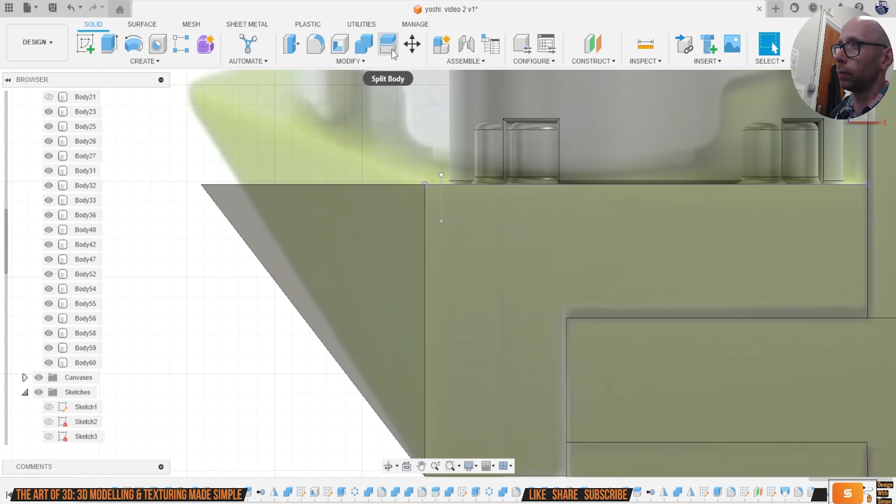Last thing before I start filleting everything, I just want to take this. I think we're going to split this down like that. Split body, so back to a separate piece. Turn the canvas off, turn the sketches off. So we've got the shape. Now all we need to do is just go around and finish filleting all these edges. So I'm going to hit F, fillet, and just start working my way around.

We did point 2. A lot of these I can just start grabbing surfaces, holding control, working your way around. Some of them you might need to do individually as well. If there's like, so this one I won't be able to click on that full face because it'll start intersecting with that. This face I can do, but these edges I won't be able to. Same with the top there.

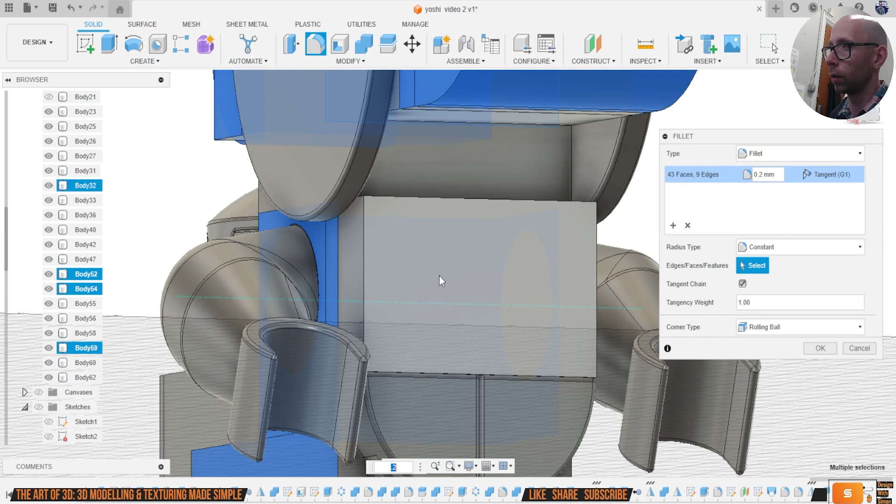Yes, if you get some of these errors, it's fine. You can do all the bits you can do, and then you can go back and sort of figure out why, because sometimes there's like a few lines that are messing up. Okay, we'll sort of go in a bit more.

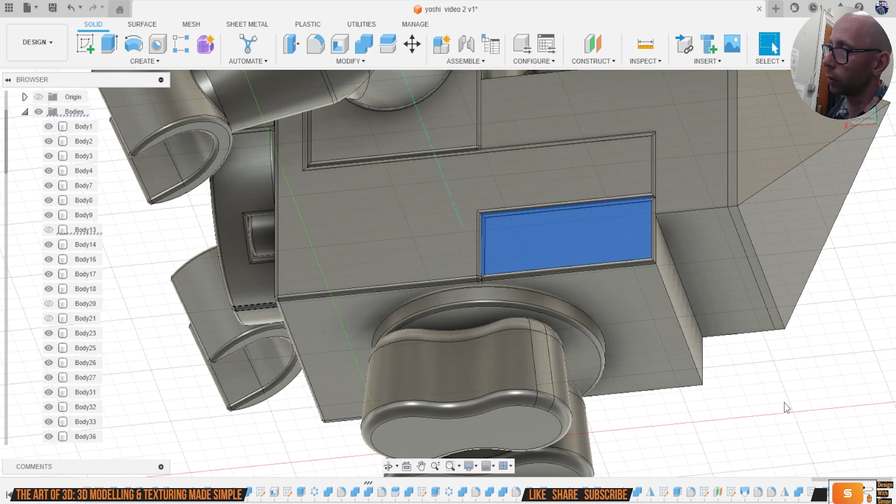So it's got to be all in one piece. That's the thing to look out for. Check you haven't got any duplicate pieces. You may have to remove any pieces where we've accidentally got more than one, which happens. It's not a big deal, just sometimes we do a lot of splitting bodies and mirroring across. It's quite easy to accidentally create extras. I think I've got an extra one there as well.

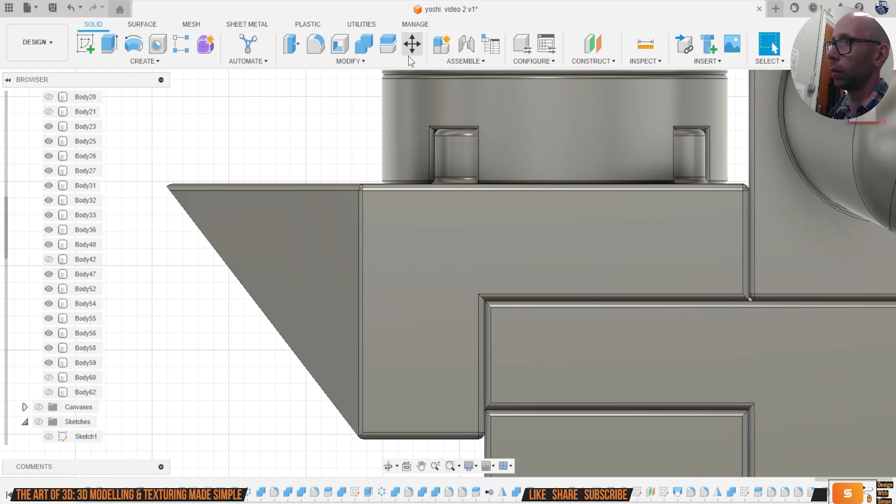Select. Yeah, this done. Split body. Turn sketch back on. There we go, looks about like it.

I think we may have got everything. Let's have a quick little look around.

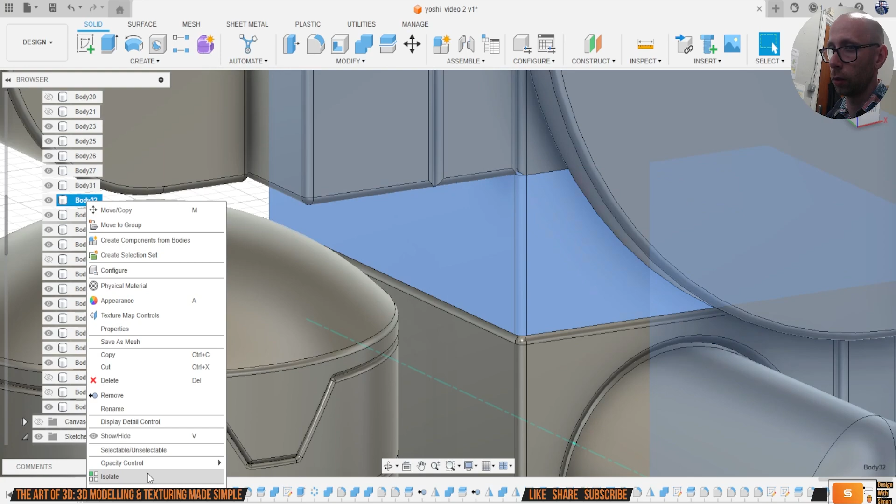Okay, so where's this one not? Okay, so we'll split this body there.

Go. Nice light. That was the bit that was the error to begin with, wasn't it?

Okay, so before I do anything else, I'm just going to take the ones we don't want anymore and right click and remove them, otherwise they're going to come over and start texturing, which we don't want. Still right click and remove rather than delete, because delete will start having loads of problems down in your history, which we don't want.

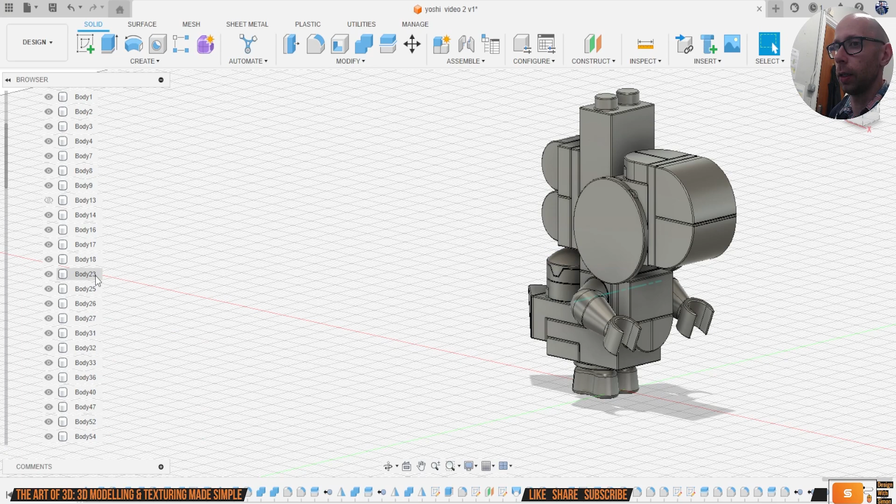Okay, so our Yoshi model is done. So I'm going to give this a save.

So what we're going to do now is have a go at texturing it. We're going to take it over to Blender to have a go at texturing it. So all we're going to do is go to File, Export, File Type, FBX or OBJ. Both will work, I normally use FBX, but OBJ would work as well. So save it somewhere where you know it's going to be, click on Export, and then we're going to jump over to Blender to have a go at texturing it.

Okay, so we're inside of Blender. First thing I'm going to do is just click off the splash screen, hit A to select everything, and then X to delete it. We're going to bring in our model, so go to File, Import, and we picked FBX.

So FBX, and then on my desktop I've got my Yoshi. I'm going to bring it in, and I'm going to have to zoom in because it's quite small down here.

So what we're going to do, hit R to rotate it, and it just goes around everywhere. Hit X to lock it in place. If I type in 90, but it's the wrong way around, so I'll just do a little minus to get it in the right place. I'm again going to hit R and then Z so I can rotate it around, again 90, and then minus again. It's now facing the right direction.

I'm going to hit S to scale and just drag and make it a little bit bigger, like that. So I'm going to give this a save.

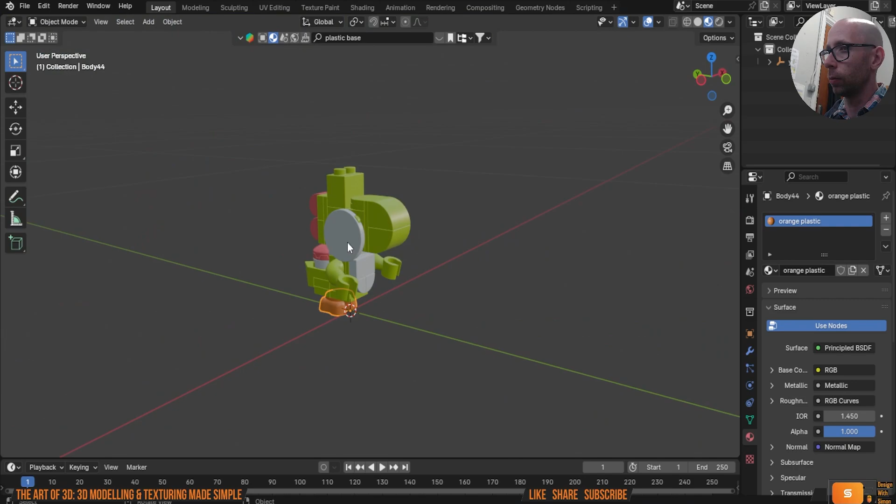Okay, so we've got the basic setup of our material, but what we want to do is unwrap it. At the minute it doesn't quite look right. First of all, we're going to go to UV editing, zoom in, go back to our material preview, and then hit A to select everything and press Tab to go into edit mode. Now I'm going to go to UV and Cube projection.

If you zoom in, you see that's now made the grains of the plastic a little bit more. We can make those bigger if we want to, but the whole point of unwrapping is that you tell Blender how you want the material to wrap around the object. So if I take that, it's saying that's what it looks like, and you do that for each body like that. But we've already done it all in one go, and then what I can do is hit A, unwrap, so it's got space like that.

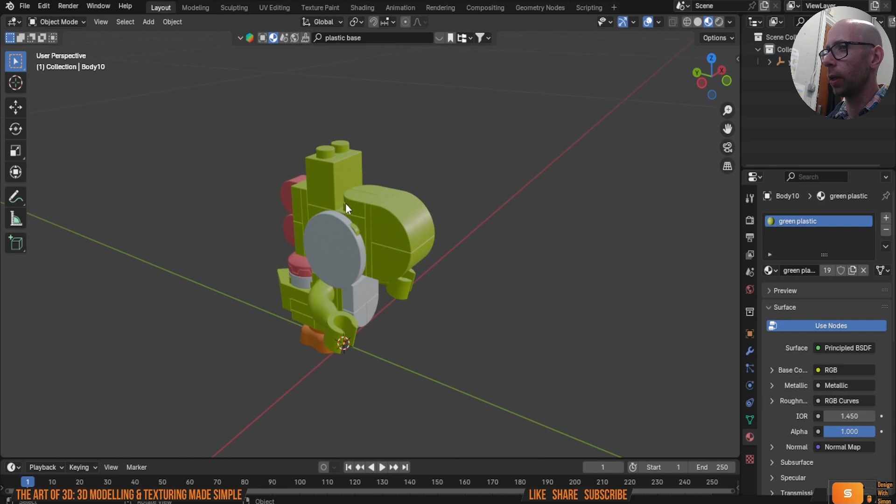Let's go to layout. We also want to have Lego written at the top, so we can do that quite easily. I'm going to come to the top view. I don't know what this key is called, it's the one above the tab key. So I'm going to go to top, Shift A, let's go to text, which is up here. Now hit Tab to edit it. I'm going to type in Lego.

We want Lego fonts. So I've downloaded that, you can just go on Google and type in Lego fonts, and then under fonts, under my downloads, I've got Lego there. Now, obviously, that is way too big, so we can hit S to scale it down. G to grab it, and Z to move up. Up to the top view.

We want to make that solid. So if we come to modifiers, generate, go to solidify, give that a bit of thickness, like that. And I can G and Z and bring it down just so it's sitting on the top. Make sure there's no gaps. And then add our green material, like that. Shift D to duplicate, and just move it across, like that.

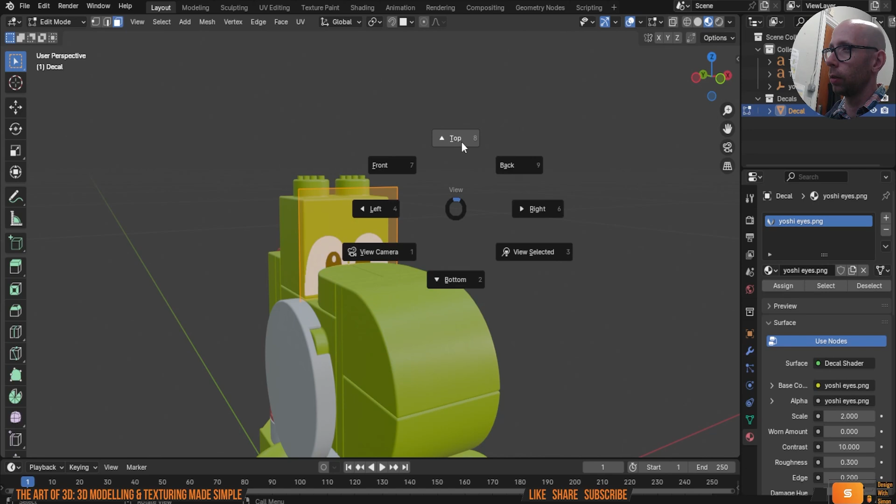So I've then got, where it sits on my desktop, reference images, got these eyes, R, Z, 90, let's scale it down, G and Z. I made these in Photoshop because I couldn't quite find what I was looking for on Google, which is fine. Front, G, Z. Let's make it a bit taller.

Something like that. Maybe a little bit taller actually. Like that. And then we've got our nostrils, so I'm going to go Shift A. Let's go to image as decal again. And then we've got one nostril, RZ 90. S to scale. I'll make sure I get this right around.

So we just want to make that a bit smaller still. G, Z to bring up. G, Y to bring forwards. Okay, we want to rotate that over. S to scale. And rotate slightly.